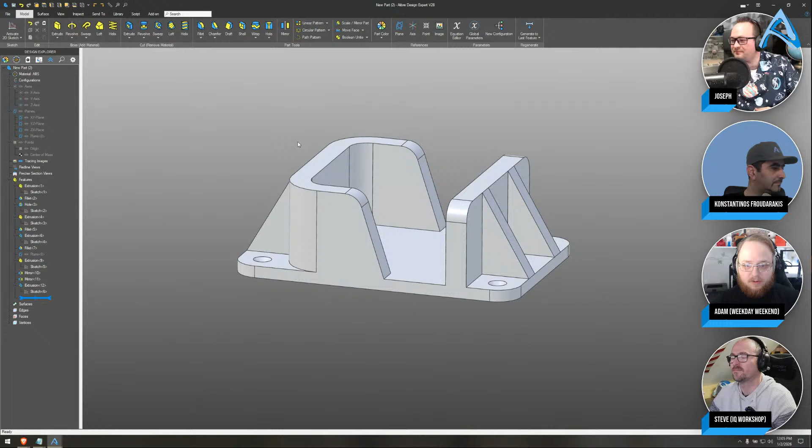I'm already in a part here and everything. This is Adam's screen. Project to sketch is basically just a quick way to get things from another sketch or other geometry into your current sketch. So if I go into a sketch here and then I just select a plane, doesn't really matter. If I wanted to use this exact curve right here, I could use my shortcut for that, or it's up here in the top left. You can click your edges or even a face that you're going to use in your current sketch.

And then you're going to tell Alibre how you actually intend to use it. You could use it as a sketch figure and have it all constrained for you with this maintain association, or if you're just going to reference it with maybe some dimensions or something like that. You can just use it as a dimension or whatever you need to do in your current sketch.

Sounds like we were echoing back a little bit. We had a little echo from you, Kostas. I muted you, sorry to do that.

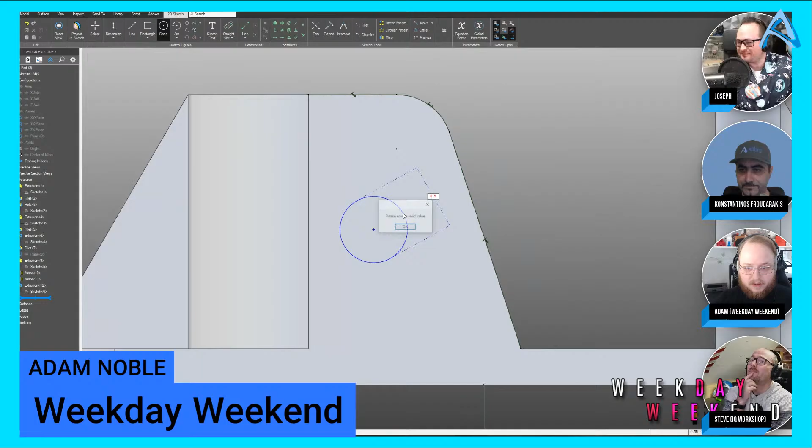Anyway, yeah. So if you wanted to make a circle here and dimension it from the top here, or whatever you might be using, or make it concentric with something, that makes it a little bit easier sometimes, a little quicker to do. Actually, it helps if I get rid of this dimension, that'll be what's causing my issue. But if you wanted to make it a little easier to dimension to existing parts of your geometry, that's what it does.

So just as a follow-up question on that, obviously Alibre is parametric and you can go backwards and forwards in your timeline. Is there a way that you can ensure that your projected sketches follow any changes you do before that point in your timeline?

That is a good question. That one might be another one for... I haven't had a whole lot of trouble with that, but that might be a better question for Joseph or Kostas there. Ask me one more time, Steve, sorry, I was working on our sound here.

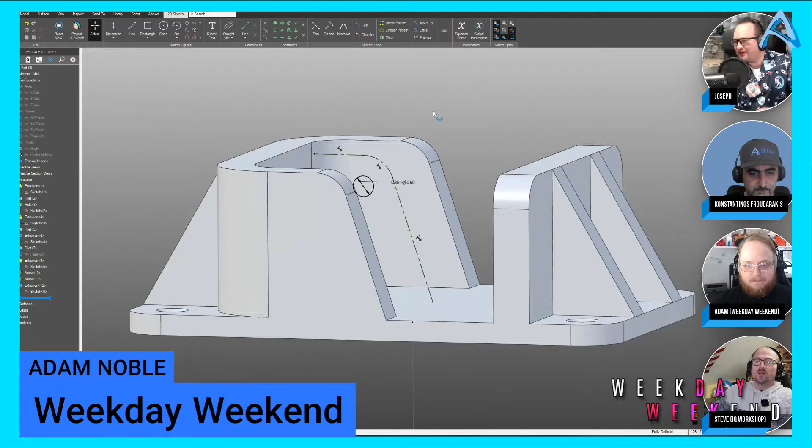So when we project into sketch, you can choose whether it's going to create sketch geometry or reference geometry. Because Alibre is parametric and you have a timeline, is there a way that you can ensure that if you make a change before the projection, let's say you change some dimensions, that projected sketch follows the changes you make within your timeline? How can you make sure it's all constrained and you don't lose the logic of what you're trying to do?

Great question, and that would come down to checking the box of maintain association. Then with association maintained, it follows the geometry. So if you can see here, I'm changing this angle of this drafted surface, and it is following it because I did that maintain association. It is indeed keeping that concentric with this arc here.

That is a great example to come up with on the fly, Adam. That's very impressive. And a lot of that will automatically dimension. If I try to dimension that and do a concentric with that arc, it'll usually automatically grab it. But there's certain things maybe you want to coincident with a point or a line that is already in your geometry.

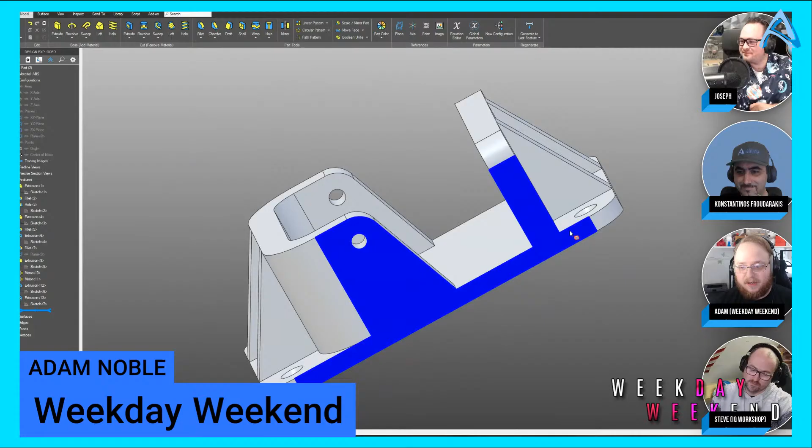Maybe something that's on the other side that you can't necessarily see. Maybe it's not a symmetric part, like this part's completely symmetric on one side to the other. Maybe it's not, and there's something on the other side you can't see. That's where it shines a little better. Because if you can see it, usually you can just dimension to it without issue, but if it's hidden, that might help you a bit better.

Nice. Let us know if that answers your question. Steve, I'm going to stop doing your job. Sorry, I stepped on you.

I see another one. Can you explain the motion hierarchy of motion in assemblies?

I can take that one unless someone else has anything. Well, take the wheel. All right, I'm going to go for it.

Let me get my screen showing here, and I've actually got a model that I can pull up. I'm going to pull that up. There we go. Okay, sharing my screen, and loading my new assembly.

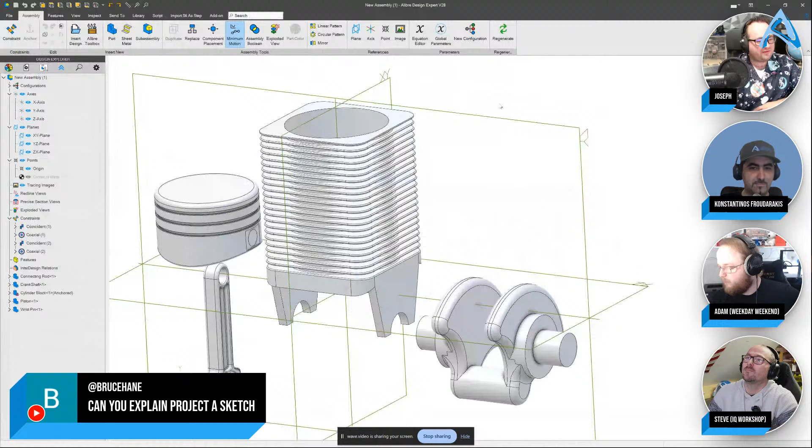So I have here this unassembled small engine, and this is great because, how do we prioritize motion in assemblies? We use a system of constraints where we say, I have the outer face of my piston, I want it to go into this round face of my cylinder block, and we make it concentric right there. Once I apply this constraint, I can move the piston in every way except breaking that concentric relationship between the piston and the cylinder block.

And I can do the same thing, make it concentric with this rod. Again, we allow for all kinds of rotations and twisting, everything except what breaks what we already have applied. So if we put it into a hierarchy system, I would say whatever you apply first is what gets enforced as its top priority, and then everything else is allowed to move until you constrain it.

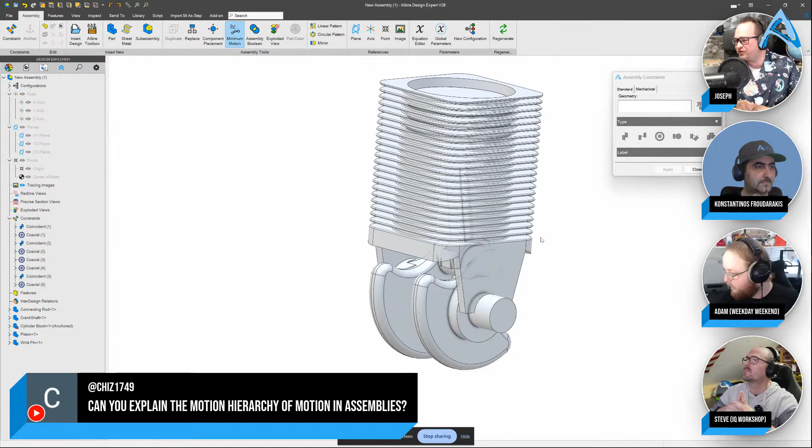That's how we can get to something that moves just the way that we want. Hopefully that makes sense. What you apply first is completely enforced, and you keep adding new relationships until you're only able to move in the way that you want to. Let me know in the comments if that answers your question, and hopefully it does.

Can you provide some tips on using constraints and ways to stay away from the over-constrained error message?

Great question. Is that probably for sketches, I'm thinking? Yeah, usually that comes up during sketching. I can take that, but I don't want to hog the spotlight. Anybody else have a preference?

All you, Joseph. I'll go ahead and jump into a sketch here. Again, if you're asking about assemblies, let me know. But here in an active sketch, I can start laying down some sketch figures, maybe with arcs, that would probably be the best example, because arcs can be pretty tricky to constrain. In fact, I'll make this arc. So let's say I have an arc and I want to start constraining this sketch.

My number one tip when you're asking about what's constrained and avoiding over constraints is click and drag. When we click and drag, we can see how the sketch is allowed to move, and that gives us really strong hints on what we want to constrain. So I know that I can change the angle of this line, and I might say I want it to be vertical. If we constrain that one step at a time, we can see that now the line is going to stay vertical no matter how I manipulate it.

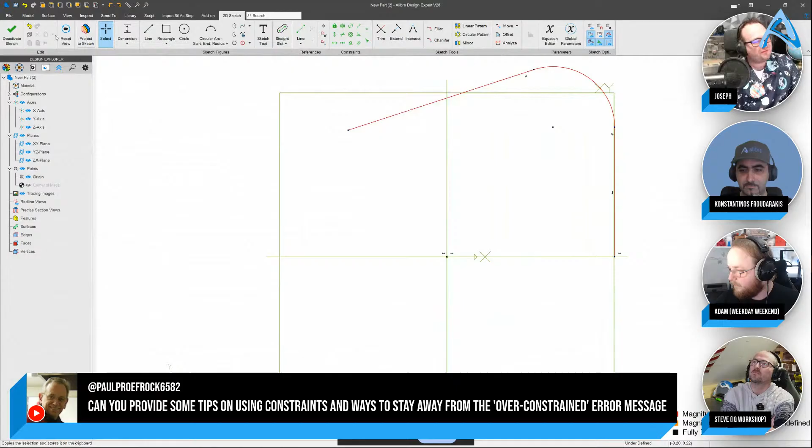I can move the end of this line. Maybe I want that horizontal with the origin, right? We just add constraints one at a time, nothing to stop us from seeing again how the sketch is allowed to move. I can say I want this arc to be tangent to this line, and then click and drag. That's what I might say, because if we start constraining something in a way that we can see it moving, we know that we're not adding any redundant constraints.

I might give this an angle of 25, and I can see that my arc can change radius. Adding these kinds of constraints to a sketch really is an art form.

With some practice, you can look at a sketch and have a really good instinct about it. If you're just starting out, there's nothing wrong with saying, let me just click and drag. Now I can see I have only 1 degree of freedom left, and it's the length of this line. Maybe I want it to be horizontal with the origin. So we know the kind of sketch we want to have, and we can just take small steps to achieve that. Hopefully that's an adequate explanation. I don't know if anybody here has anything to add.

He looks like he's saying that he's having it shown in assemblies as well. Ah, okay, perfect. Yeah, and right quick, sorry, didn't mean to interrupt there, Bruce.

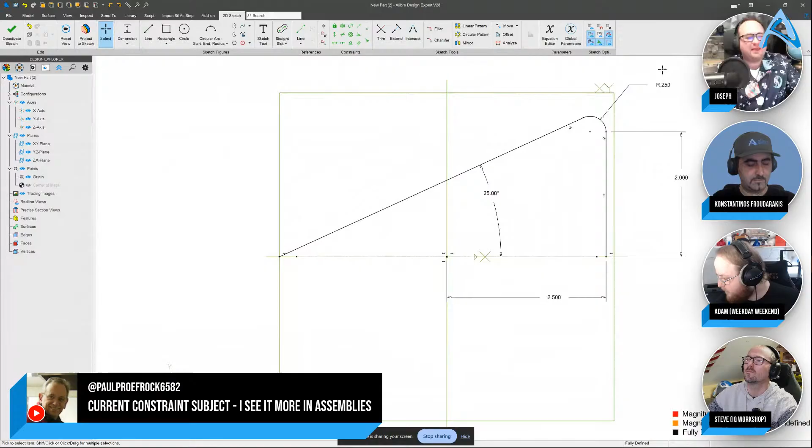There is a lock that you can do. You can lock sketch figures and things without necessarily dimensioning them. Of course, you would usually want to dimension everything as much as you can to get it fully constrained. Yeah, exactly. Thanks, Kostas. Sorry, didn't mean to interrupt you there. Awesome, no, I'm so glad. Please interrupt me all the time because you guys always have great things to say.

The nice thing is what I just explained about sketches really applies to assemblies as well. If you think about sketches as taking all these degrees of freedom of how the sketch can move and constraining them, same thing with assemblies. We're just dealing with moving parts, and often feel free to utilize this click and drag technique.

So once I add a few, I can see I can twist here, and I don't want to twist here. One great way to prevent twisting is I can select a flat face, or I could even show reference geometry, and then these orange planes are the planes that I used to model the part from the part environment. I'll select a plane, make a constraint, and if I don't want that piston to twist, well, I can apply that, but that makes it so the rod can't swing.

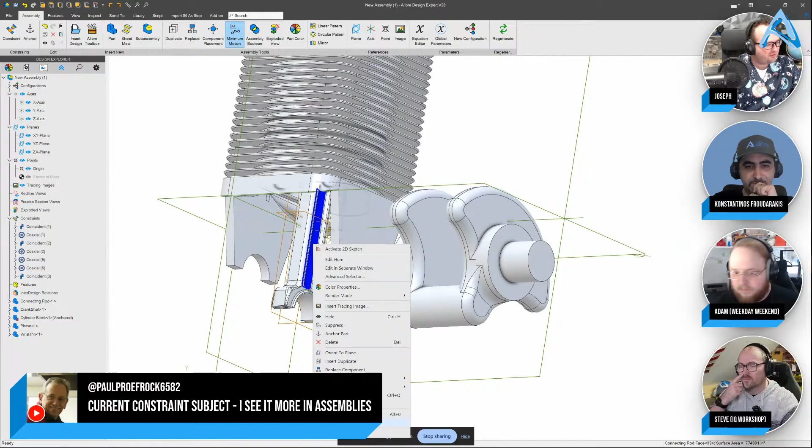If we end up in a situation like that, we can look at our part in the Explorer, go to our constraints, and I can edit that coincident constraint, and maybe make it an angle. Actually, 90 degrees is what I wanted. And now, because we did an angle, our rod should be able to swing, and I'm not seeing it swing.

So of course that happens. Let's suppress that. Yep, sometimes you need to uncheck minimum motion for things to work when you have multiple constraints. But again, constraints are a highly mathematical thing, guys.

There's a lot of work in the background from Alibre to try and understand what you're after. For example, we're used to putting something in place using 3 coincident plane constraints. But in Alibre, things have 6 degrees of freedom: X, Y, Z, and 3 rotations. Using 3 planes to constrain stuff gives you 9 degrees of freedom locked down.

So Alibre needs to figure out which are the 3 redundant ones, and give you what you want. And that doesn't always work. It is an issue in other CAD software as well. It is an issue in Alibre as well.

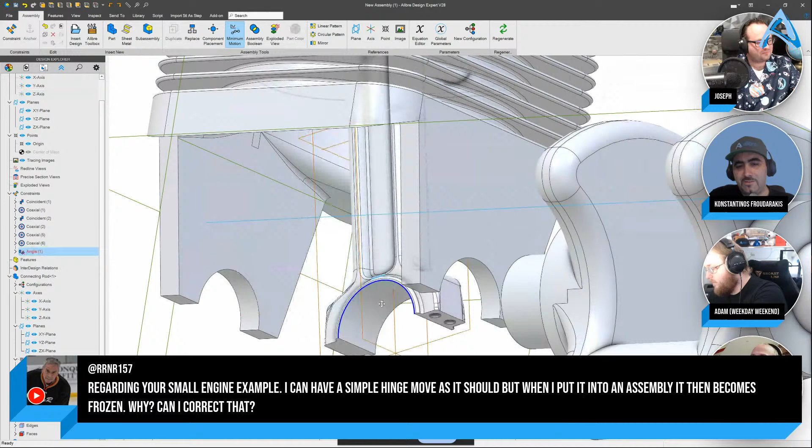A few other tips and tricks, like what you said. For example, if I may interrupt you there again, that very problem you had, Joseph, in a similar video I did, I constrained the plane on the piston, not the rod, and that might make it work. But it's such minute changes. And Joseph on the official Alibre channel has a very good video on creating assemblies with such constraints.

So thank you. If you do come across errors, everything that Kostas said is of course fantastically on point. Also, when we look at what could be causing the error, this is not an Alibre issue. Every modeler has really intense algorithms that figure out these mates.

One big issue, which applies to all modelers, is if I put a constraint and make that concentric, we've eliminated the crankshaft's ability to rotate around the top axis, eliminating a few degrees of freedom. If I apply another mate, like putting this right up against that face, this mate also eliminates that same crankshaft's ability to rotate around the top axis. Using mates that eliminate redundant degrees of freedom can be the cause of most errors you see in an assembly.

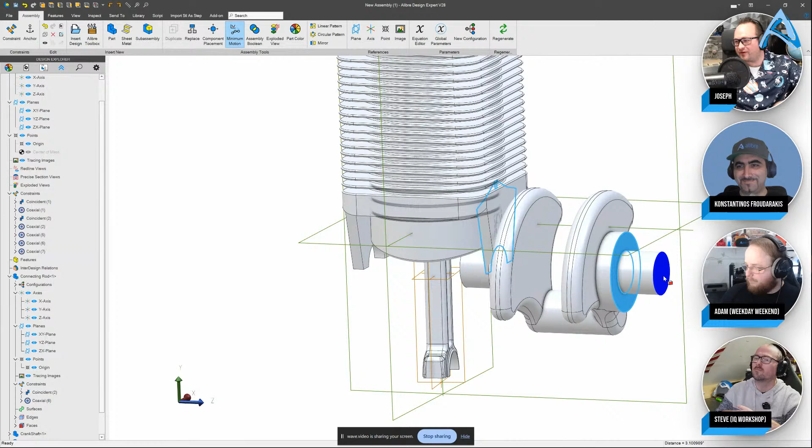So instead of making all these big faces, you can put a point on there and make that one point level up with the plane. Any modeler using Alibre or any other modeler, that helps fix those issues. It's kind of a universal algorithmic problem — there's probably not a perfect constraint solving engine out there.

Again, it really starts with clicking and dragging to see what your degrees of freedom are, and then eliminating those one by one. Let me know if that helps in the chat.

Yes, a frozen subassembly — I can take that one since I have some things up already. Let me save this. Why not? Oh, I better not, I'll do a save as, because this is a webinar part, so I don't want to.

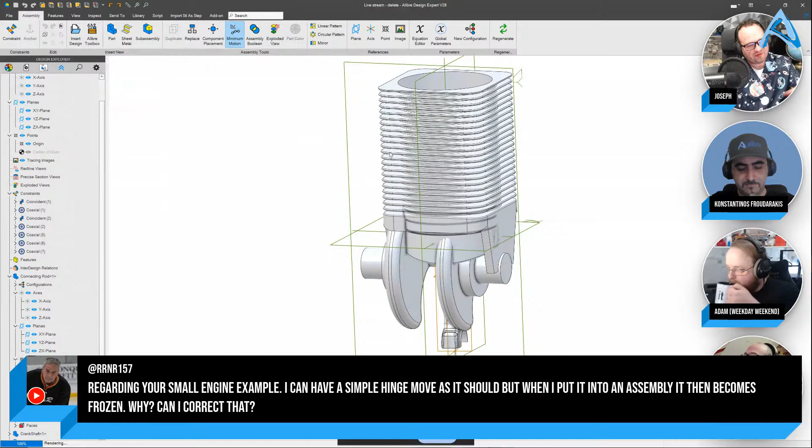We're going to make a little temporary assembly here and start a new one. Oh, I just opened a part. Okay, so we're going to say new assembly, and let's import the assembly we've been working on. It will come in frozen.

Okay, perfect — again, can't move anything. You might ask yourself what's going on. So we're going to right click right here and say make flexible. By default, all your subassemblies come in frozen, so that when you move something, a thousand parts don't fly everywhere unpredictably.

So we manually make that flexible. Looks like that's still anchored, so now I can move all the parts in my subassembly. Hopefully that's a pretty simple fix for you that you were able to see in real time. Anyone else have anything to add?

Nope, not at the moment. All right.

I have an error that says entity is deleted when I try to extrude, but the sketch looks complete. I can modify it, but it won't extrude without the error.

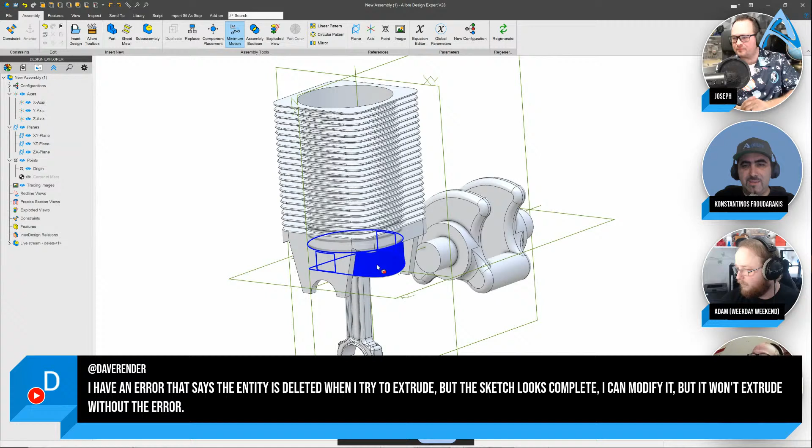Sometimes I've come across this, and Dave, I don't know if that's exactly what you're trying to do. If you're coming from a different CAD software like SolidWorks or Fusion, you might be used to making sketches that have more than one closed area or section, and Alibre cannot extrude when you have more than one closed section.

So that's one way to fix that. The other potential problem, which we discussed in the previous live chat, is especially when you're importing sketches copied from something else, or importing a DWG or an SVG — sometimes you get duplicate lines. In these cases, you want to use the Analyze Sketch tool, which is a massive help.

If you want, guys, I can do a quick demo. So this is pretty much the example we did last time — this is just a simple slot. If I try and extrude this, it's going to let me extrude, and it's letting me drag and do all that.

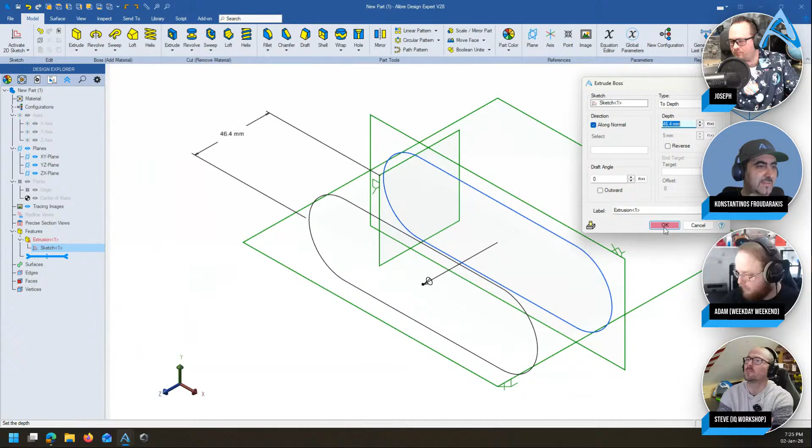However, if I have an overlapping line here, it is the exact same thing visually. But if I go and extrude it, it's not going to let me. As you can see, I've got a red button there, and if I click OK, the extrusion comes in with an error.

Sometimes the errors are very helpful — it says here the sketch cannot be used because an endpoint is wrongly shared by multiple primitives. When you see that, you should look for overlapping lines.

Sure enough, if we go back in and use the Analyze tool, let me bring it over and click OK — you get an open loop, and it shows you where the open loop is, plus an intersection and an overlap. All of these errors are caused by the same thing, which if I go in and delete, we should be fine.

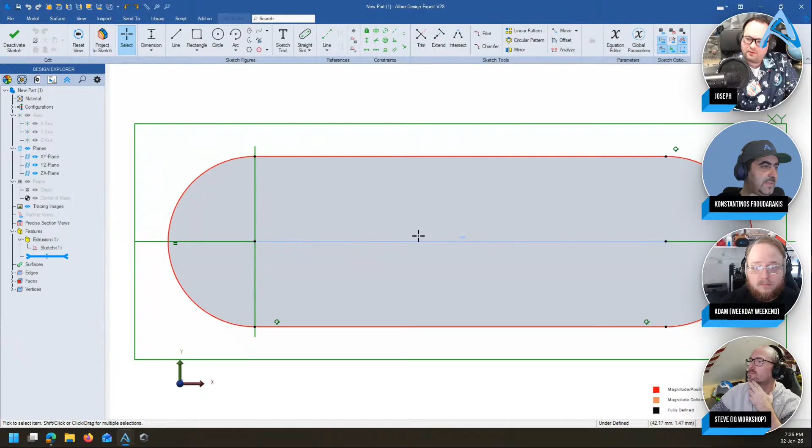Right, and now I can extrude again, right? There you go. So yeah, just to show you what I mean by multiple sections - I don't mean this, Alibre is going to know to make a hole there. What we mean by multiple sections is something like this, right? These are multiple sections.

So yeah, Alibre is not going to know what to do with that. If you're a SolidWorks user, you might call it multiple contours. It's different lingo - contours, sections, I think Fusion calls them that. But still, I hope that answers your question. If it doesn't, let us know again and we'll discuss it further, because this is a great issue, right? This is something that comes up very often, and it's definitely worth discussing.

Another quick addition to that - this is Max. If you're seeing an error that says something like attempting to access record marked as deleted, it's just a general error. Oftentimes you're in a weird state - and by that explicitly I mean that some chain of events has occurred where your part may be in a state such that you might want to back up to your previous save, depending on the nature of what that error message sounds like.

Sometimes it'll keep going and you'll be fine. Sometimes the weird state can compound on itself. So especially if you can find ways to reproduce that consistently, that would be an example of something that you should send to us so that we can look at further. It really just depends on the wording of that error - sometimes it's something you can fix, sometimes it's not. And maybe you should just delete the sketch and start over.

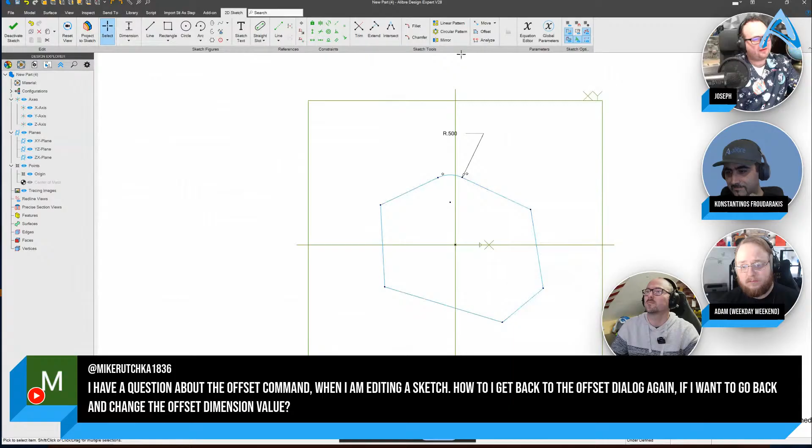If I jump in here - I'm already sharing my screen. Let me open up a new part and create a sketch. Let's say that I have this sketch that I want to offset. I'll make it a little bit more interesting. There you go. And so I can chain select and offset right there, and I give it a value, and I want to offset that later.

As of right now, of course, it's not parametrically connected. We do get a lot of requests to get that, and we are wanting to work on that. But as of right now, perhaps the easiest thing to do is just chain select, delete, and then we can re-chain select and offset again to our new value.

And if you leave things unconstrained, then you just delete the red stuff and start again - it's kind of an indicator that that's their offset value. If you do fully constrain it, then you should be able to just adjust this dimension and have it update automatically. So I think that's the best answer I can give. Let me know if anybody else has anything to add.

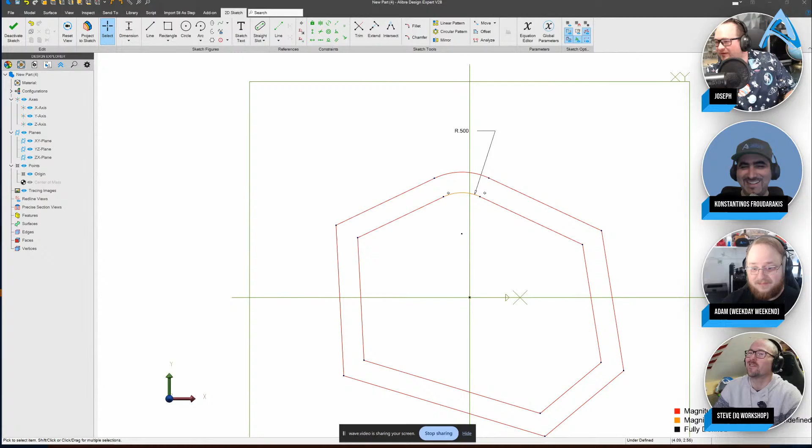I saw a very interesting question. Oh, here's another one. Well, one did come up, but I saw a very interesting question about Kostas being gracious in helping someone, if I can find that one. Yeah, wow, our producer is on point. That was amazing. Yeah, Rufus, yeah.

So I'm saying, people, first of all, thank you so much to Rufus for being so kind, and people join the forums. Join the forums. First of all, your question might be the question of somebody else, and by asking the question, you might help somebody, which is true for this stream as well. And secondly, you will see that there are many people active in the forums and eager to help. Right? It's part of the value of Alibre, if I may say so. Right?

It's the forums are so good, so come chat with us. I'm a bit of a beginner on Alibre, and there's nothing much I know about the system program for me to even do anything you all are talking about.

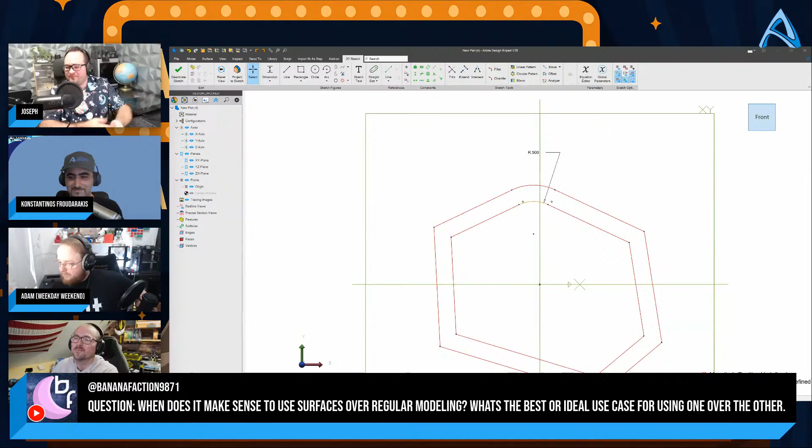So moving right along, when does it make sense to use surfaces over regular modeling? Oh, this is awesome. Is there an ideal for one or the other?

This is made for Joseph, this program. I can certainly pull up a good example. Does anybody have any comments as I pull up a new model here?

Oh please go ahead, I think. Well actually, can I just say we had a great example in the first live stream where we turned the model into a surface, did a thin extrude, projected that thin extrude to get parametric sketch offsets. So that's a good use of it. But I'm sure Joseph has like 1,000 different uses for it. I'm just sure he does.

Yeah, Kostas knows exactly what a fan of surfacing I am. So I would say if you can model and get the job done using solid geometry, do that. It's going to be a lot more simple, more straightforward. If someone else wants to go through the model, it'll be simpler for them, and it's probably less computation depending on what you're doing. So prioritize solid geometry.

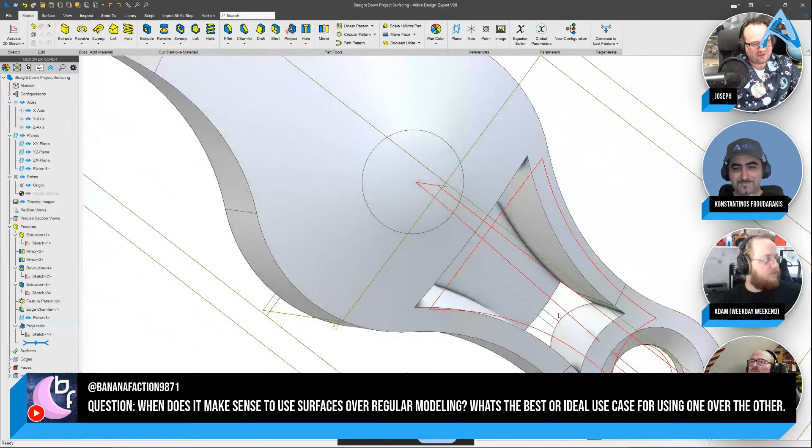Well, if we're going to CNC that, those walls have a lot of overhangs, and that's just not going to work well. I went too far down and broke through the bottom there, but that's not good intent. We want our walls to be vertical, right? And what's the solid modeling solution? Well, it would be an extrude cut, but if we need this face to follow the same curvature as this face, it gets hairy with extruding, right?

So there's a few ways we could approach this with surfacing, and surfacing just augments our ability to do things like that. So maybe if I go with the surfacing solution, I'll extrude this to 1 inch, and then make this floating body a surface. I'll grab a surface here and delete this top face. In the surface workbench, I delete the top face, and now I have these infinitely thin references of the outside of this thing.

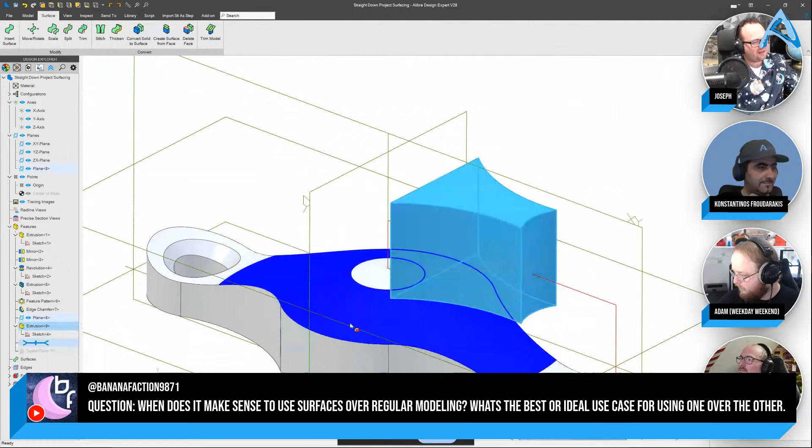But before I do that, let me select these faces here and then create a surface from a face. There we go, and I can move my surfaces upward. You can see that surfacing does break down into a lot of steps, and this is one reason why we may want to default towards solid modeling whenever possible. Let's move that in maybe less than 1 inch, maybe 0.5 upwards. No, 0.75. So we get what we want. There we go.

And then I'm going to modify my sketch. As you can tell, I maybe didn't have this set up for demoing yet. So make that, not that. No. Okay, that should do it.

So we've got the surface, right? And then we can cut out the bottom of this so that the curvature of this face matches. So we're going to say surface, trim model. We select our surface, and then we just trim out the bottom of that, right? Now you can either hide or delete face. There's schools of thought that are great for both. I tend to delete face to get rid of my surfaces when I'm done using them, but now we can take that back to a surface.

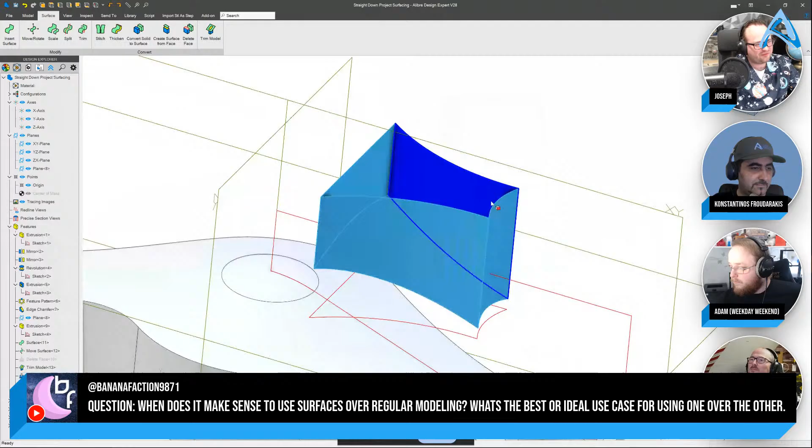Move that downward. We can tell this is just a lot of workflow for surfacing that might be able to be done in one operation with solid modeling. So we'll move that down 1 inch. Once again, trim model. I promise I'm almost done. And then if I go to hide my surface down here, what do you know? We have those vertical walls that are a lot more manufacturing friendly, right?

So surfacing, we can overcome those difficult specific problems by generating surfaces that do what we need. So that's probably the case to use surfaces over regular modeling, but default to regular modeling whenever possible. Let me know if that answers your question, and thank you for asking.

Greetings from the Space Coast.

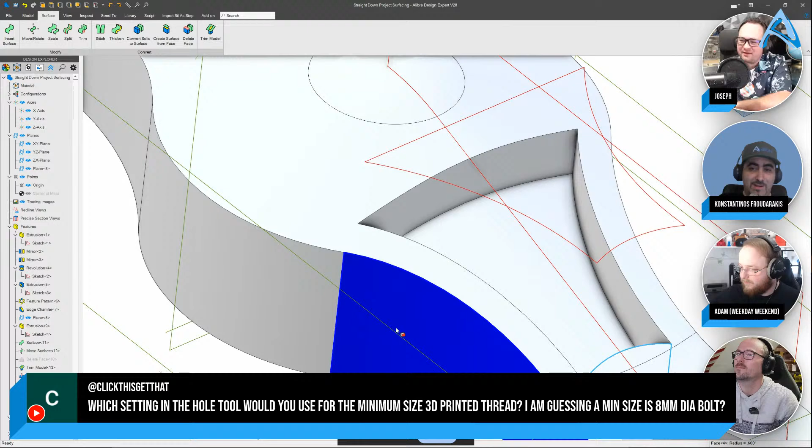As 3D scanning becomes more and more widespread and affordable, it's helpful to do a webinar or videos that show how to use surfacing. That might be an interesting one, a surfacing webinar. I have brought that up, and maybe that's the push over the edge that I need to start pursuing it. So let's talk about that internally and see what we can do. I think there's a lot of great value in webinars that cover lesser used features. I can second that, a webinar on surfacing, because every time Joseph puts up something about surfacing, I learn something.

Not just surfacing, direct modeling as well, right? Alibre has some really clever direct modeling features like delete face, like offset face, and stuff like that. And when we're talking about importing faces and models, surfacing and these direct modeling commands are a game changer, and they can get you some amazing results. So yeah, definitely worth pursuing, I think.

Thank you very much. Which setting in the hole tool would you use for the minimum size 3D printed thread? I'm guessing a minimum size is an 8mm diameter bolt.

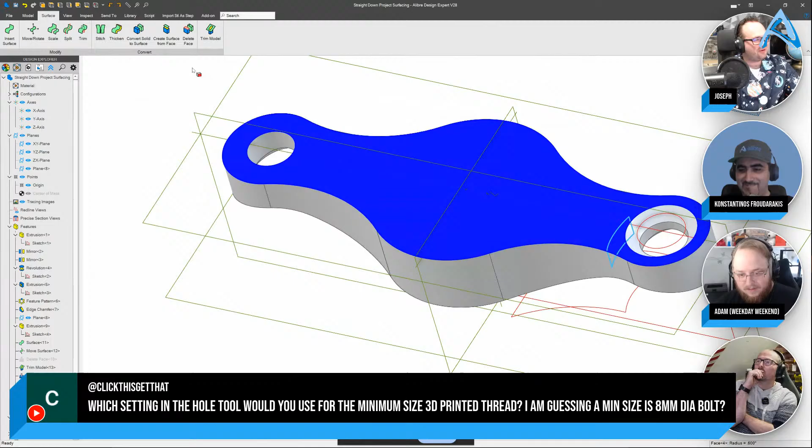I don't want to hog the limelight. I do have an answer for that because I was kind of involved with the threading, the thread and hole tool when it updated in V28. I'll take this one, let me know if anyone has anything to add. I'm not quite sure how on the hole tool, which setting in the hole tool do you use. Are you just talking about the...?

I think I'm running a lot of RAM right now, so I might be running a bit slower. But I'll choose - I think the question is talking about modeled threads, right? Yes, which Joseph indeed actually worked on most of them.

So yeah, Joseph, if you want to take that one, and then there's another very interesting question by David on how to use a reference line in a sketch as the axis of revolution. As soon as you're done, I might take that on. Oh, awesome, I'd love that.

I'm just going to open up a new part here, make sure that things are behaving for me. Don't forget to close - yes, that's probably the biggest thing if you're eating RAM. Steve always gives excellent advice.

We're going to go extrude that, and now let's jump into the hole tool here. Make sure things are working good. Okay, so we're going to say unified coarse, how about. And then we'll up the size of that, 0.5. And then we want that to be modeled.

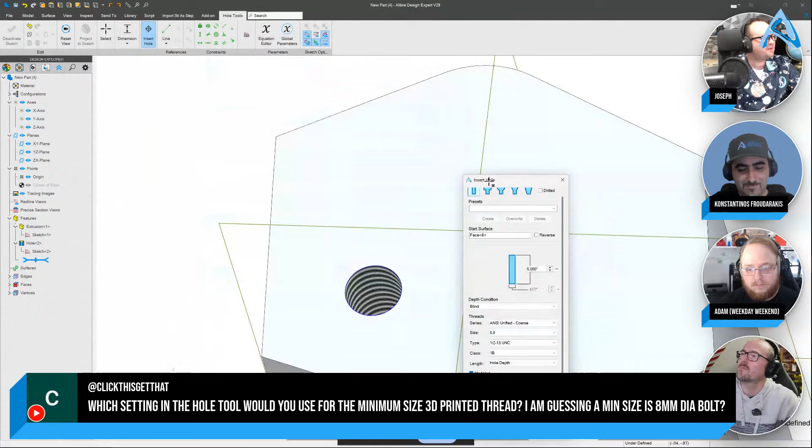And so when we go to the modeled, there are several options, and I think this is what the question is around. This is the nominal thread, right? And when we talk about screw threads, the nominal thread is when the male thread and the female thread have the exact same profile, no gap between them. So it's not a realistic thread.

If you want a production quality thread, and not all platforms do this - so I'm going to pop my collar as Alibre and say that we've got the cool features - we can change this to a production thread by going to, say, average. This is the center of the line tolerance for regular threads.

Now, when we go to minimum material, this is going to be for the loosest fit, right? Because it's the smallest amount of allowable material for the 1/2 by 13 coarse thread, loosest possible fit. Now, if you want to have a really tight fit, this would be the maximum material for the production thread. So if you're not on nominal, there's going to be a gap between your internal and external threads - this is for the smallest gap, tightest fit, and this is for the loosest fit.

Now, if you're 3D printing, 3D printers tend to overbuild a little bit, so you always end up with a little bit of extra material. I'd recommend always 3D printing on the loosest. But if you want to have a tap or a die and you want to fine tune it yourself, maybe you want to go the max material so you have the most material to be able to remove in a very fine fashion. Those are my thoughts on it.

Anybody else on here have any thoughts worth noting? You might want to also just double check that your 3D printer is well calibrated and all that kind of good thing.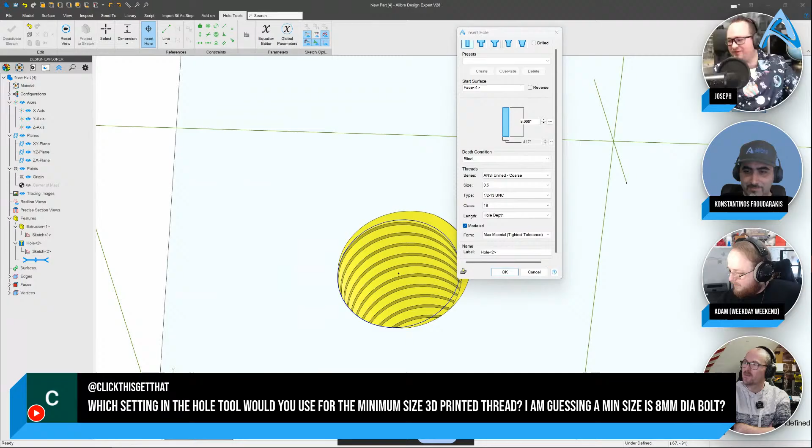Basically, just double check your 3D printer is well calibrated and all that kind of stuff. Threads are quite difficult sometimes.

Now, using the minimum material, I was able to get threads my first try, but I've spent a lot of time calibrating my printers. I don't know that my Ender 3 V2 Neo could do it. My P1P certainly can, but my other one might be a little iffy despite all its calibration. So definitely test out your own printer and learn what it can do, because every printer is going to be different. For me personally, using minimum material worked first try, but if it doesn't, you might want to do some flow rate calibration, which is usually built into things like Orca Slicer.

In addition to that, you can look at tolerance tests to print on Printables. There's bound to be some on there that you can figure out what your 3D printer is capable of producing.

You can make adjustments in your CAD for when you 3D print either the bolt or the hole. There's some tolerance compensation built into Orca Slicer as well. Yeah, unless you're doing something custom, my recommendation would always be to have a tap and die set, and run your threads through it. If you're printing something bespoke to your project that isn't a standard thread, then yes, you need to have your hole and bolt calibrated so they interface properly.

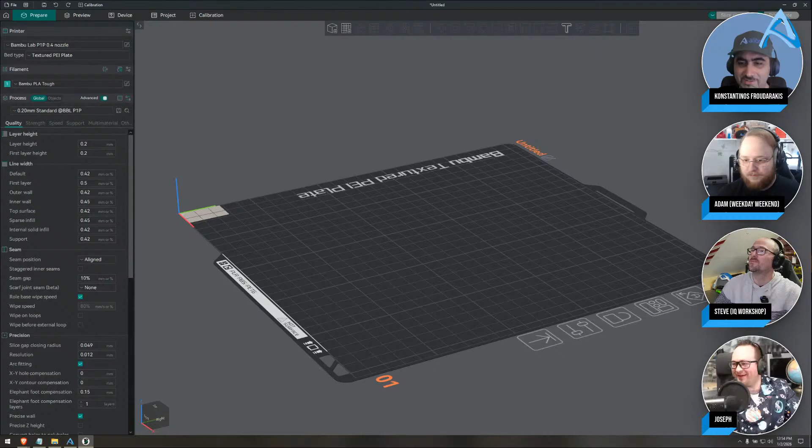This might be a good one here for you, Joseph. Actually, before we go there, let me take over the screen, because David had a great question, which is how you can use a line in a sketch as an axis of revolution. So let's say that I do something like this.

Okay, this is a bit rubbish as modeling, but still. Let's say that I want to revolve this. First, let me show you something - if you click in a blank space, you get this very handy toolbar, or you can just hit the space bar and it comes up as well. So you hover over part features and go into Revolve Boss, and you get your sketch pre-selected here. That fly-off toolbar is really useful.

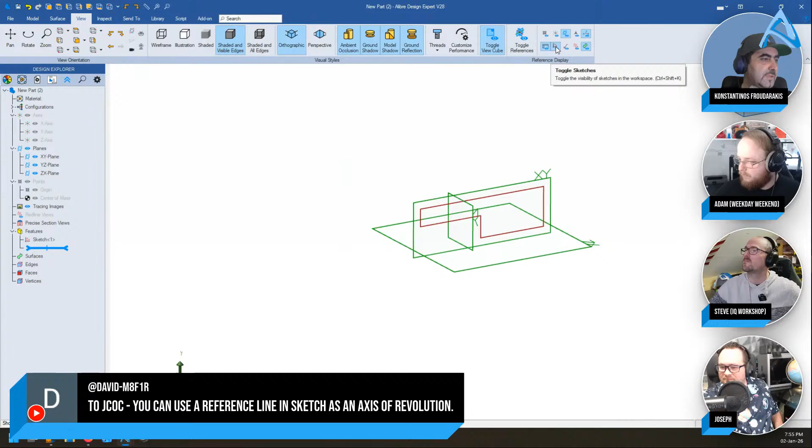Now, how to use a line of your sketch as an axis? First, you need to go into your view menu and make sure you have toggled your sketches on. The hotkey for that is Control-Shift-K. So you see I'm just toggling it on and off. But when you have it on, you can use your sketch lines as an axis.

For example, as soon as I hover over this line, you saw that it got a different color, let me show that again. As soon as I hover over it, it gets a different color. So I click on it, and now that line is used as the revolve axis, or I could even use this one. So first, you need to make sure you have toggled your sketches on.

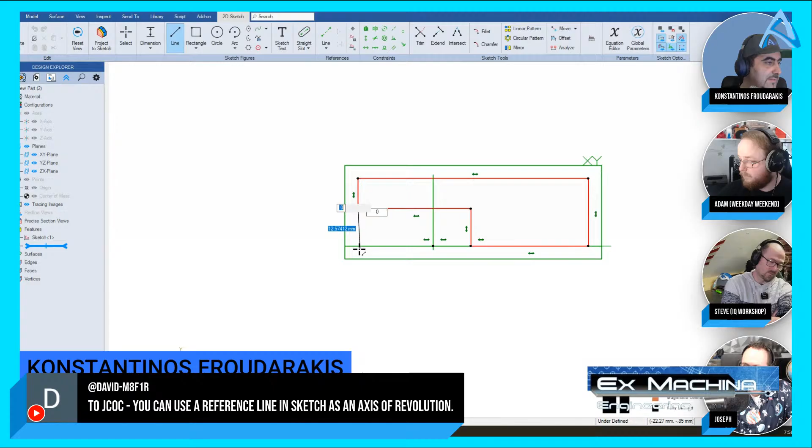And I want to show you yet another way to do it. Whilst you're in Sketch, there is a button in the references area of the toolbar that says Insert Axes from Sketch. Let's do something simple - let's say the axis I want to revolve around is a reference line. Now you see that when I close the sketch, the reference line is no longer visible, but I want to revolve around that reference line. So I hit here where it says Insert Axis from Sketch.

This is the window that comes up. I select this line, I hit Apply, close, and now as soon as I come out of my sketch, I have an axis here, which I can use to revolve around.

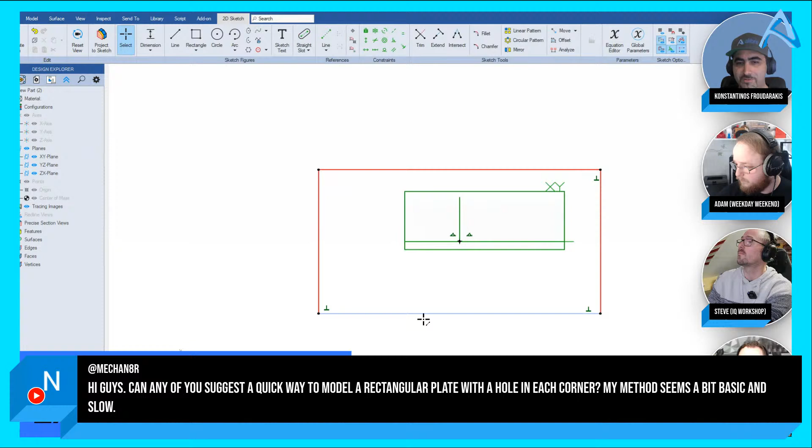So I select my sketch, I select my axis, and this is another way to revolve around a line from inside your sketch. If I can hog a bit more time, Mechan8r had a very interesting question. He said, let's say you have a rectangle and you want a hole in each of the corners. One way to do it is you can look through my channel and find the pattern fill equation, and use that to get one in each corner, or fill the entire thing with holes. But here's another way to do it.

Let's say this is 50 by 50, and I'll extrude this for 5 mil. This should be fine. And I'll put a hole here, slightly centered. And then this hole is also 5, and I'll cut through all. So yeah, this is a speed modeling quick tip.

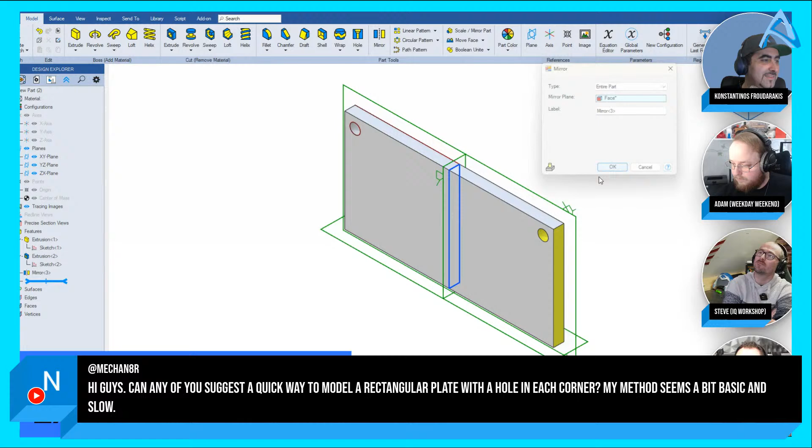Just use mirror. If you use this as the mirror plane and mirror the entire part, now you've got 2 holes. Then if you do that again and mirror the entire part, now you've got 4 holes, one on each corner. So that's a quick way to do it. If your part's conducive to using this, just model a quarter of it and mirror it around.

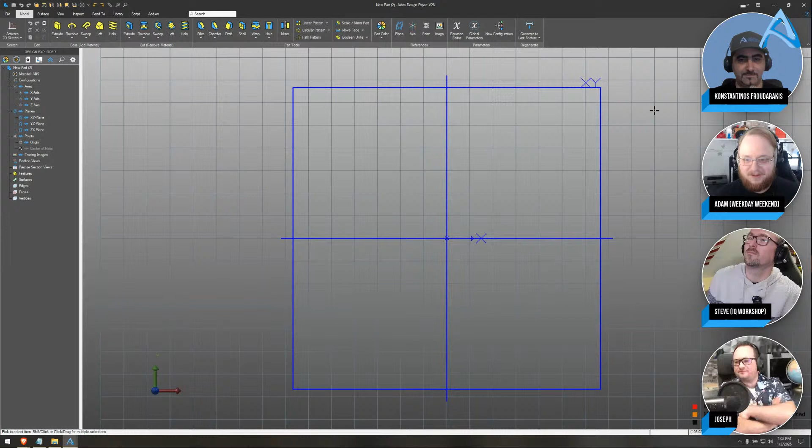Okay, so I don't even, I love your color scheme by the way, thank you, I hardly ever use it. It's this very top right here, kind of small to see, but this little padlock looking constraint right there, the fixed constraint, that's what you'll want to use. And you could have a bunch of stuff, and you can just Control A and you should be able to just.

Oh, my fault. But you can just fix your stuff with the fixed constraint like that. There we go. Yeah, if I do it all, it tries to fix them all at one time. But just use your fixed constraint, and it tells Alibre, hey, what you see is what you get, just put it right there, don't worry about it. If you can, always dimension it, though.

I'm glad you guys were here, because I think I was reading that question wrong. So I think that's exactly right. And let us know if that's not what you wanted.

In sketches, I sometimes try to add a dimension and get a message that there's too many constraints, but picking up slightly different points or a different order will make it work.

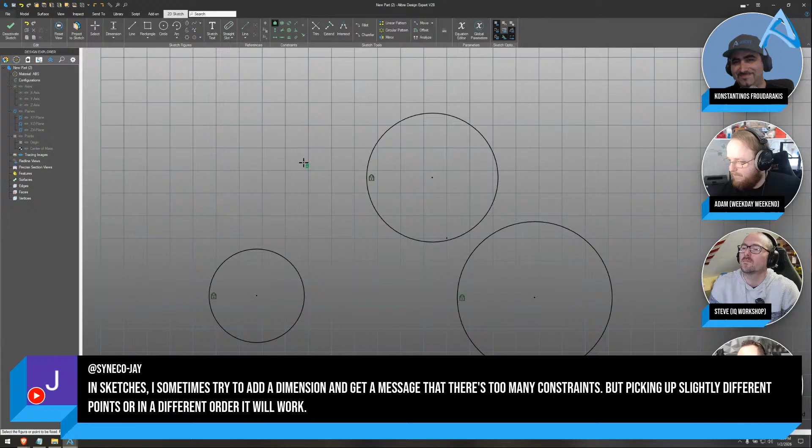Sketch solvers - it happens in every platform I've ever used, but I think they're quite rare. It again comes down to the same principle of: can we establish this sketch with fewer constraints, or constraints that eliminate 1 degree of freedom instead of 5, so that the next thing we add limits the amount of redundant constraints when you lock up different degrees of freedom.

Again, this is kind of a theme for this stream. I'm really liking it - we'll call this the redundant constraint stream or something. The more complicated your sketch gets, the more likely you're going to run into something like that. And it's not necessarily the fault of Alibre or any modeler, just that the more stuff the algorithm has to work through and calculate, the more likely something's going to catch on something else and you'll run into an issue.

Can I just add another thing? When working with a parametric design software like Alibre, or SolidWorks, or Fusion - every time you're working with a parametric CAD, not AutoCAD or SketchUp - it pays to have simple sketches. Every little feature of your model should be a different sketch, and a different feature at that.

Sometimes people will tell you that layout sketches are the best or fastest way to work. In my experience it's not, because then it becomes very difficult to troubleshoot your model or to actually control it parametrically through global parameters or through Excel, which Alibre can do both.

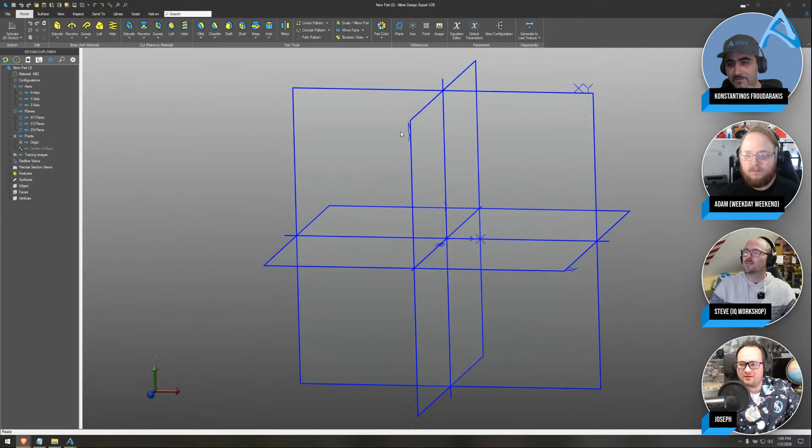So, you mentioned the sketch analyzer to try and find faults - is that available in Atom 3D? Or where is it, because I can't see it.

Great question. So in expert and professional level, in a sketch, we have this nice little analyze feature. I have to lay some sketch down here, but analyze is right there in expert and professional. In Atom 3D you don't have a button that invokes this, but if your sketch has an error - if I maybe make a line on top of a line and we deactivate the sketch - I have my warnings turned off actually, but a little warning will come up normally if you don't turn it off, and then it gives you the option to analyze the sketch. So it's a bit more baked into the system than being forward facing, but there you go.

Ted Nickel on Facebook, I think he just answered your question as well - overconstrained, that analyze sketch is going to help you out right there. Or you can look at the error that comes up with the sketch, that's going to tell you what caused the error.

Often when doing a sketch, I use the dimension tool, and the last node or line is automatically selected. Is there an option to change that behavior?

That's a good question. I'm not sure there is, but I just love that feature. It's helped me in so many speed modeling qualifiers, where you add a constraint to a line, like an equal or vertical constraint, and then you just hit D and you're dimensioning that line. I don't know, I actually love that feature.

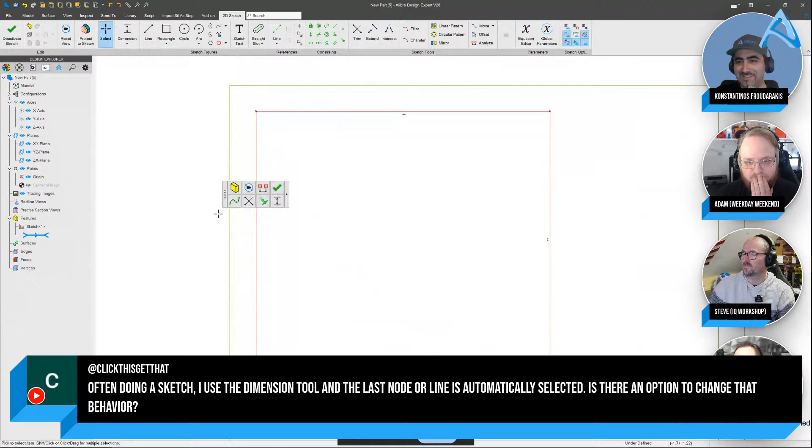So for example, if you make two lines equal, the last line you selected is kind of left in memory. And if you hit D, you're actually straight jumping into dimensioning it. Yeah, so I just love that behavior. I don't know if there's an option to disable that.

Okay, I've got one that's simple. If I make these equal, and then if I just click in the white space and hit D... yeah, exactly, if you click in white space, it's deselected. Interesting. That could be a good suggestive feature, maybe it's easy to do.

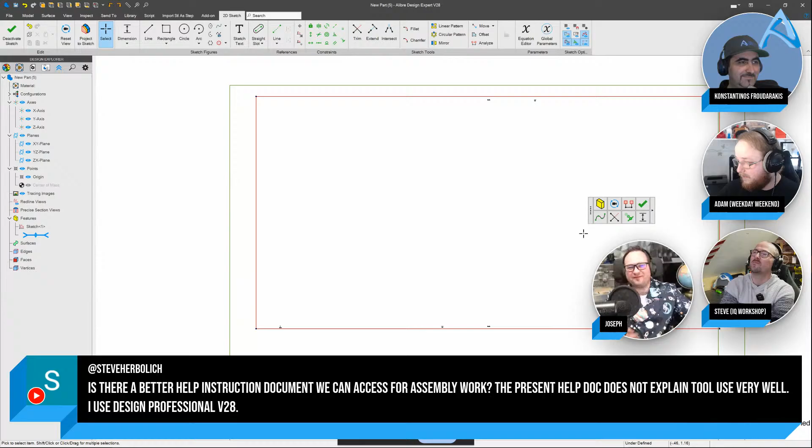Interesting. Well, we have the official documentation at help.alibre.com, if that's what you're referring to. There's also a lot of material on YouTube. We have a long playlist covering all of the assembly workflows. And then there's some YouTube channels out there like Weekday Weekend and Ex Machina. Ex Machina doesn't have a whole lot on assemblies, but Ex Machina and the official Alibre channel will definitely have you covered there.

Why can't I use a disconnected line in a sketch as an axis of revolution for the intended feature? Yeah, it comes down to how we need closed contours to define how we want to revolve. This could be a good one for you, Kostas, since you're pretty sharp on revolves. Yeah, I just did an example of that, but it doesn't hurt to do it again.

So if you guys just show my screen, because this...

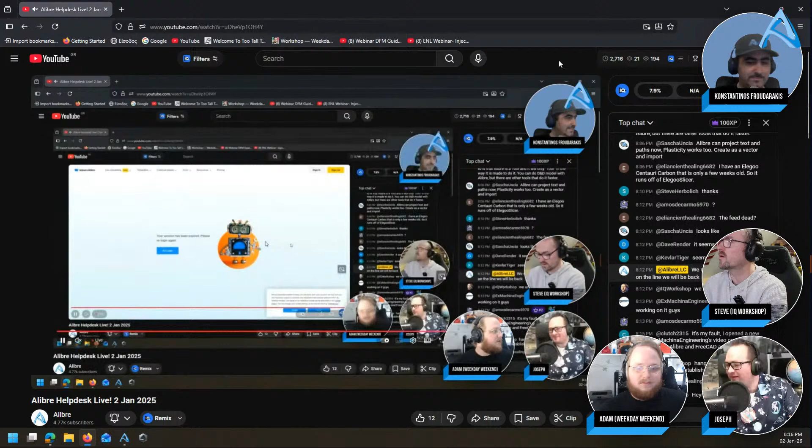Oh, we're back, live. Screen recovered. We're back, guys. We're back in business. Okay, leave us a comment if you can see us. I think we are back, looks like we have a session expired. Maybe, I can see us on the live stream. Oh, that's my screen, is it? Yeah, that was my screen. Okay, there we go.

Okay, so we're back. Sorry about that, guys. Just to answer the question that was on screen when we crashed, which was about... well, I can't find it now. It was axis from Sketch, I believe, but James something, I don't remember the name exactly. We did mention that briefly, but it's a good example to go over further.

So what I did earlier on this stream is I made a reference line here, then went to insert axis from Sketch, selected this one, and made an axis out of it. Now I can hit revolve, and as an axis, I can select this axis I just made, and I get the revolve.

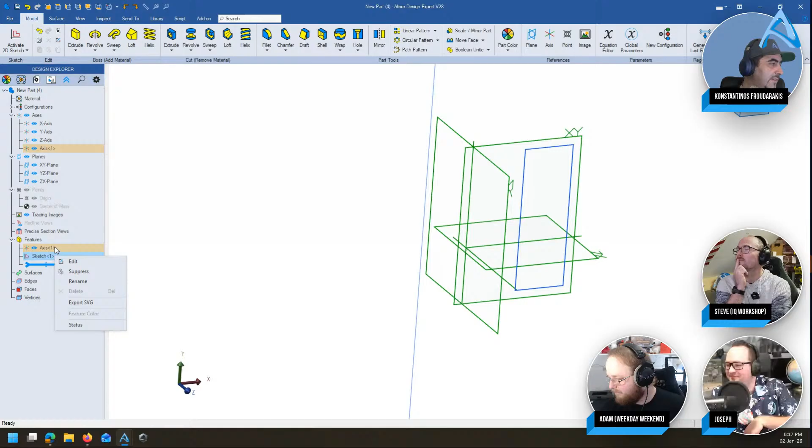Cool, that works. Now there's another thing to be said here. Let me hide my axis again. If this one is converted to a regular figure, even though I have my sketches showing, here's that line. If I try and revolve it, even if I select this line as a revolve axis, it's not letting me do it. The reason is that line is a regular figure, so we fall back to that same problem with the two sections not being usable for features.

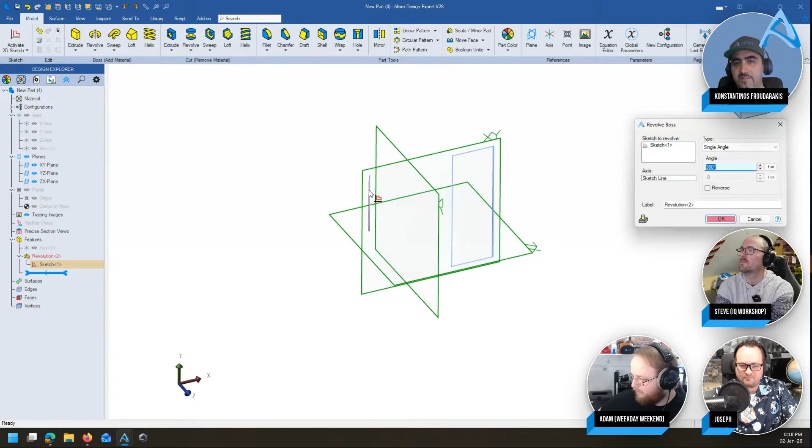This is a different section or closed loop as far as Alibre is concerned, so that's why you'd have to close it off. Even if I select this sketch, even if I select this line, it's still not doing it, because this is a regular figure. So if you want to use it as a revolution axis, convert it to a reference line, then use insert axis from Sketch, and you'll get an axis created, which you can then use for whatever axes are needed. Brilliant, so that's that.

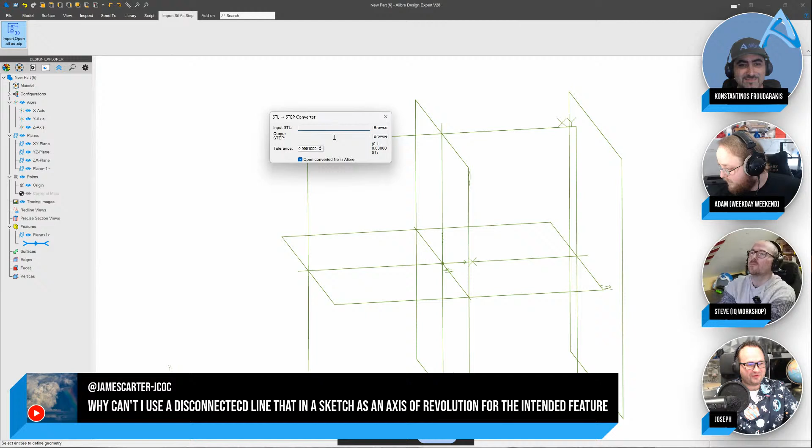On the Alibre forums, he has this import STL as step add-in that you can have, and I still haven't used it, but you can choose the STL that you want to input. It's great, isn't it? Yeah, then you can have your output step file, and it imports it into Alibre that way. So there's third-party software, and there's also that add-in. The add-in, of course, is not made by Alibre, so it's third-party, but great user on the forum, if that helps.

That's another reason to visit the forums, right? There are some great add-ons there, made by amazing people.

Ted on Facebook, it might be worth adding this as a feature request. Then I know they're looking at a lot of new stuff, and it might be something they'd be willing to consider. I would put that there as a feature request just to see. And as well, if you have any feature requests related to scan data or bringing in mesh data, make sure you also explain what you want to do with it, because part of the reason we haven't done it yet is that depending on what you want to do, it requires vastly different sets of technology.

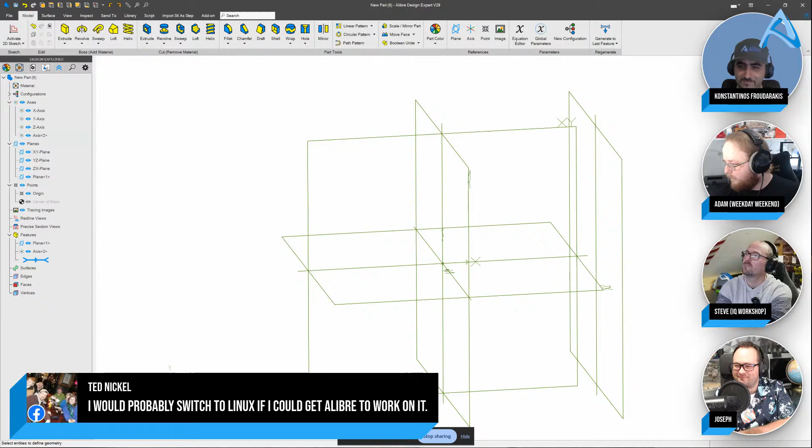If you just want to look at it, that's pretty easy. If you want to look at it, cut it in half, and interrogate a cross section to create a sketch, well, that's a whole other thing. If you want to convert it into a solid and drill a hole through it, that's a whole other thing too. So it helps us hone in on which technology sets are most valuable if we know why. So be sure to include that if you submit a request.

And one quick comment for you, Costas. I like the Alibre hat. Thanks, David. So Davinchek also makes some great videos on Alibre and plasticity, I think. He's made some great content with Alibre as well. Yeah, really nice YouTuber. And thanks for the comment. I didn't make the hat, actually.

Well, I guess here's the plug. That's a nice hat, Costas. Where'd you get it? That's a nice shirt, Adam. Where'd you get it? There's a website, isn't there?

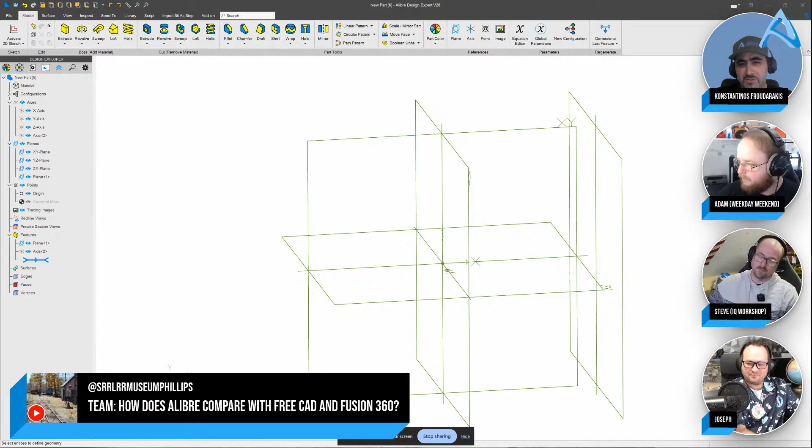It's like microtransactions, exactly like microtransactions in video games. As soon as you throw in a single one of those extensions, Fusion becomes horribly, horribly more expensive than Alibre. And as I've said very often, Alibre is something like 20% of the price for 95% of the performance. So that's my take on that.

It's based on what you're going to use them for. We're not saying FreeCAD isn't a good CAD package, but for the money, do you want to spend however much Fusion is per year, or pay once and get Alibre for as long as you need it, and when they come up with an update you need, pay the update cost. But when it comes down to it, guys, Atom 3D is $200. You wait for a sale, you can get a little bit less than that. Atom 3D is amazing, especially for 3D printing stuff and hobbyist work. If you're doing professional stuff, I mean...

Can I also say, because Adam just reminded me of something? Many people say Atom 3D is the hobbyist level of Alibre, right? Well, there's a difference. With Fusion and SolidWorks, if you use the hobbyist level, it is illegal for you to make money with it. With Atom 3D, it is not. That's a pretty important distinction, and I just had to get that out.

Without getting into legalese, I would also recommend people check the terms of service of their other CAD softwares versus Alibre. In my personal opinion, Alibre's is way better and way more consumer friendly. I did a video on FreeCAD going through their TOS and disclosure policy and how much of my data is being shared with God knows who. So my take on FreeCAD is, one, I love the fact that it exists, in the sense that there is an open source piece of software that has features.

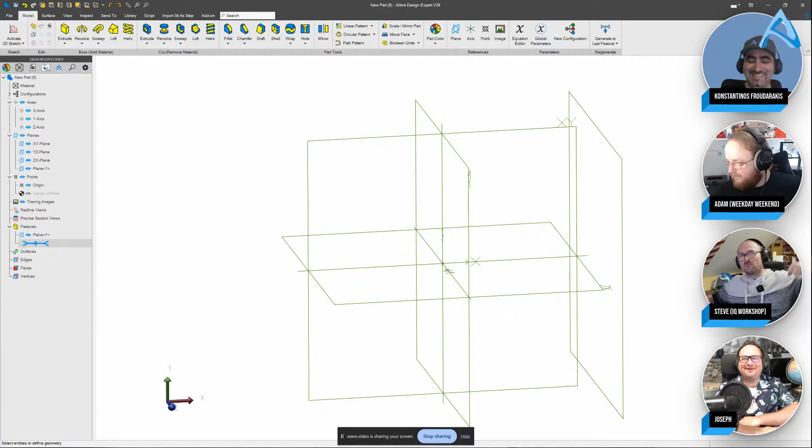However, comparing it to Alibre is like riding a bike, whereas FreeCAD, with all of its different workbenches, is a little bit like that sketch in Mr. Bean where he's sat on top of his Mini in an armchair, and he's driving it with a mop and a rope. I find I've got to do mental gymnastics to use FreeCAD, where I can just get on with my work in Alibre.

I think that's a great analogy, actually. Costas had a fantastic comment on one of my earlier videos. It's basically like you can get FreeCAD to work, and if you learn FreeCAD from the beginning, it will work for you, but it's almost like learning the right thing the wrong way. Alibre is industry standard, guys. It does everything the same way that every other CAD software does it, or better. And FreeCAD, you're having to go through hoops to do some things. Tools aren't named the same sometimes, or features don't work the same as they do in other CAD packages. Whereas Alibre is much closer to, or exactly, or better than what you would find in the other options.

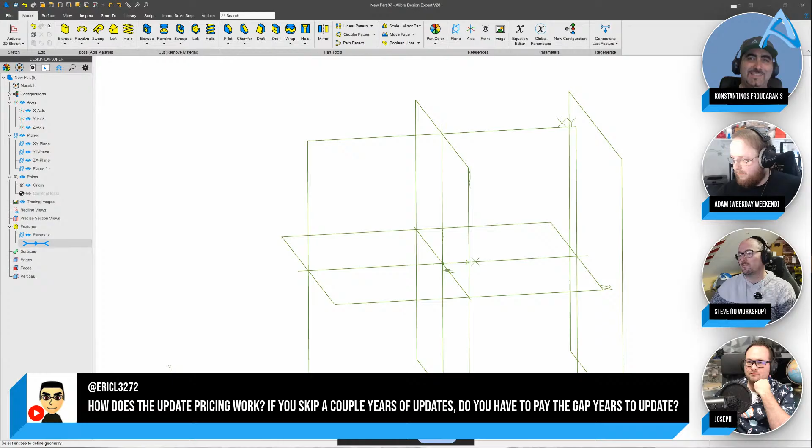So Eric, in Alibre, I'm not 100% sure on the actual amounts, but there is a small late fee. In Greece, for Expert, the update is something like 400 euros, and the late fee is something like 200 euros. But that's it, and you get the latest version and one year of maintenance, so you can download the latest version and all that. That's a ballpark number. But no, you do not need to pay full price for every single update that you missed - that's a very bad business practice. These are things that actually make me kind of angry. CAD companies charge that because they think they can, and they shouldn't.

I've actually recommended Alibre on that same premise. Exactly. Yeah, they're squeezing the lemon too hard. They are. It's just that, isn't it? It's just that.

I thought this one was interesting - how to rotate a plane a given amount.

We're still looking at my screen. So one thing you can do is use a reference plane and create an axis, and then say, I'll make a plane here defined by this axis and another plane, and what's the angle between them, maybe 30 degrees. But I think what the user is really getting at is if I make a sketch on this plane and then later says, oh no, I want to rotate this plane, how can I do that?

We can finagle the history tree a little bit and say let's pretend this axis doesn't exist. I can make a plane and offset it the same amount. Now I don't remember how much that offset was... let's say 2.5... 3. There we go.

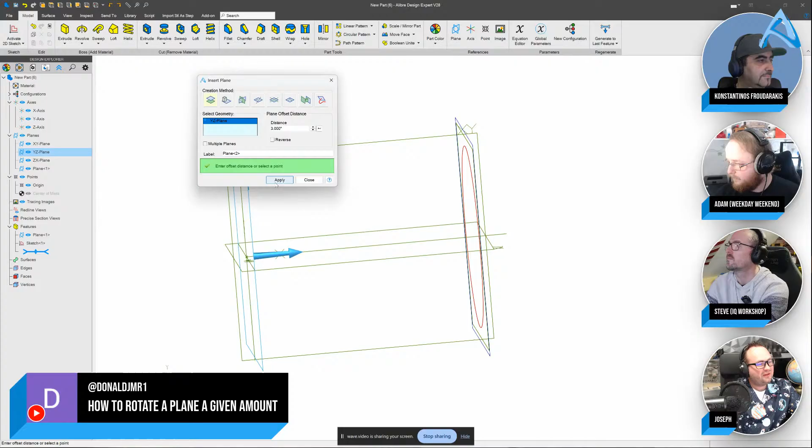So if I have two planes overlapping, I can take my axis and define it on this next plane. Then I can take the plane that has my sketch on it and drag it down the history tree so it's the last thing. Then we can redefine it on the YZ plane and on my axis. Hopefully I get this to work. So we edit and choose our axis. Yep, and then it goes to our angle, 30 degrees, and there we were able to rotate that sketch.

We can always change the order of things in our tree so it doesn't have to be fixed the way it is. Let me know in the comments if that answers your question.

One other one: can you add left-hand thread design in the custom thread sheet? Excellent question. As of right now, that's not supported. Please document that need and use the suggested feature, because we'd love to know if a lot of users are looking for left-hand threads being natively supported in our tool. They obviously can be manually edited, and you might be able to mirror the part to get that as a workaround.

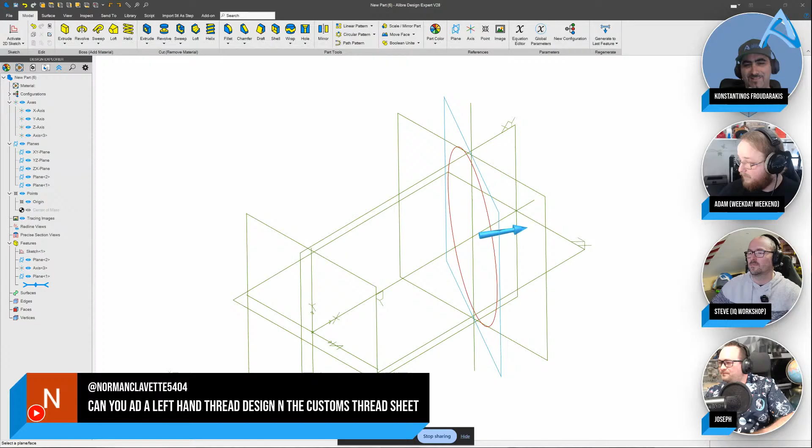You can mirror the part, right? Could you do that with surfaces, I wonder, Joseph? Yes, you could. I don't know how much we want to get into that, but that's maybe a great standalone video. Mirroring the part will give you a left-hand thread. Yeah, for sure.

Bradley Erickson asks about importing an STL. We covered that just a couple minutes ago. Kostas has some good stuff on importing STLs. There's some workarounds needed, but it's possible - you have to go through some other hoops, but you can do it. Kostas has some good videos on that, from Ex Machina Engineering.

I'm going to try to see if I can finagle a left-handed thread. Here's another one that might be interesting for you guys, especially Steve. Do you do much woodworking? I wouldn't exactly call the work that I do woodworking. I mean, I probably ruin boards, but... I think you're just being too modest. That's what I think.

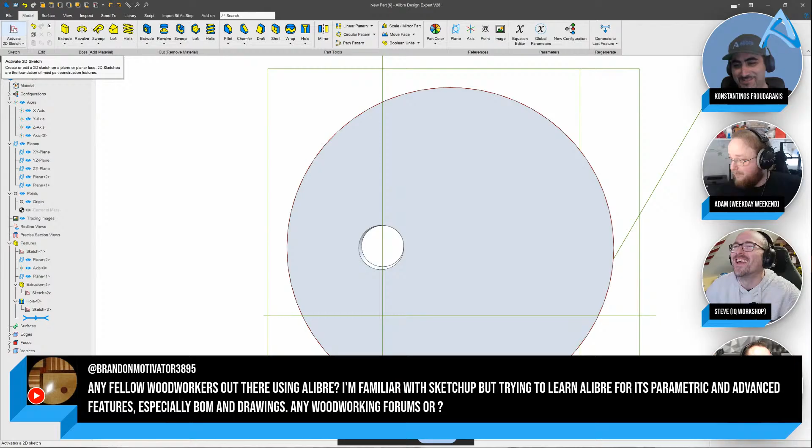This one's looking specifically at if you were to build an assembly, can you get a bill of materials and the drawings so you can have a cut list and all that sort of stuff. That's not something I've done using Alibre natively - it's something I've done manually, but I guess that's not going to be the answer to the question, right? What can Alibre do in that regard?

Well, can I just say that if you watch my channel, watch this space in the next month or so for a nice little woodworking mini project. But yeah, definitely bill of materials and drawings.

The beauty of Alibre as a parametric modeling software is that you get a bill of materials and the drawings, and they update when you change your part. So you can have a cabinet, for example, and design it so that when you increase its height, the sides adjust themselves, and you can have 3 or 4 shelves in it. As you make these changes parametrically, the bill of materials is going to reflect that and update, and the drawings will also update with the new dimensions automatically. That's the beauty of parametric modeling over something like AutoCAD.

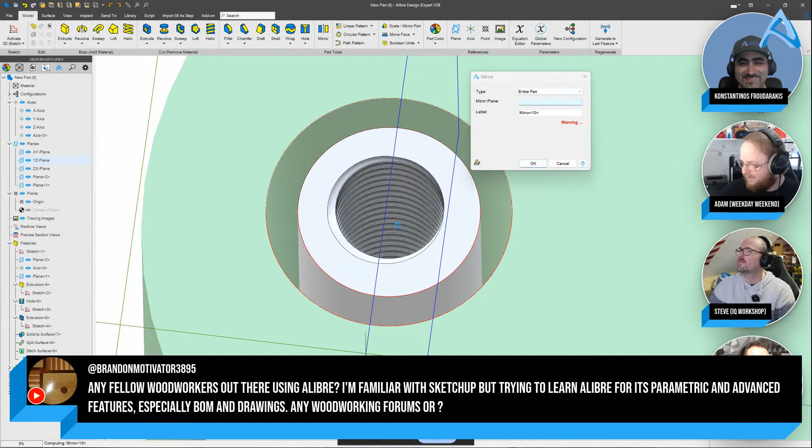Getting back to this question - I think I added such a long thread. But the way I would use surfaces... Yes, that's what I thought, great minds think alike. I created a thread, converted the whole thing, used a cut to cut out this thread so it's its own floating body. I converted everything to a surface, stitched this to a solid, and I'm trying to mirror only the thread so other features on this model are ignored. Then we can stitch it back into a solid. This is pretty heavy, so we'll see what happens, but that would be my approach if we were using surfacing.

I think we have another one here. Do you rename every constraint, or use the default name? I've gotten into the habit of using default, and it's very difficult to find the correct constraint. Excellent question. There's an old saying: not every good modeler renames everything in the tree, but there are no bad modelers that rename things in the tree. I had a professor in university who taught me CAD, and in exams he would take off marks if you hadn't renamed every single sketch and feature. That was annoying during an exam, but in a large model it can be a lifesaver.

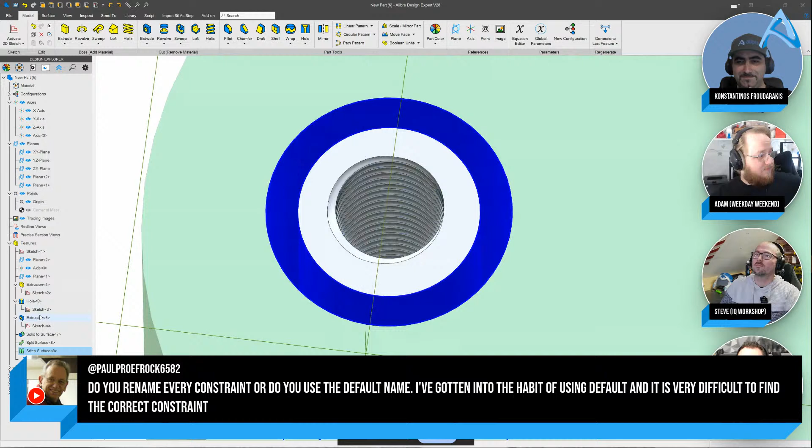When it comes to renaming every constraint, I rename the important things, especially when it gets convoluted. You can use all caps if you want something to stick out a little bit more. But yeah, hopefully that helps.

I don't rename anything, and my helper has to fix that. That's me in the future. Gotcha, your helper is you in the future. Very much so, and your helper always curses the previous person for not renaming everything.

Bradley Erickson, thank you so much for the comment, I appreciate that. This might be a good one for you, Kostas: what is the best way to create a reference mid-plane between two features? Oh yes, that might be a good one.

Let's go to your screen, Kostas. Sorry to shove one at you, but that's what I'm interested in. Do not be sorry to do it. Okay, so there are many different ways to do it. Let me just get a quick model going.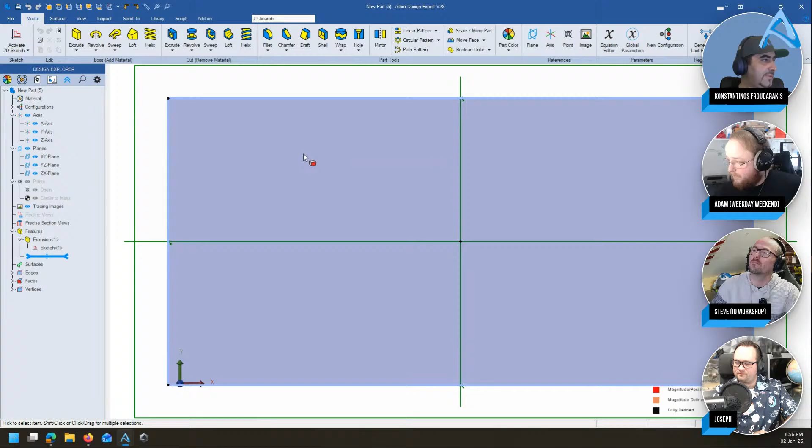So I'll do 100 by 50, let's fully constrain it, let's do 10. And then I'll just start another sketch - I'll imprint everything, get a rectangle going for 20, and let's do that for 50 millimeters. Then let's mirror this. I promise you guys, there's a reason I'm doing this. Okay, so let's say we've got this part.

Oh, that wasn't very clever, was it? Yeah, well, it was. Let's see.

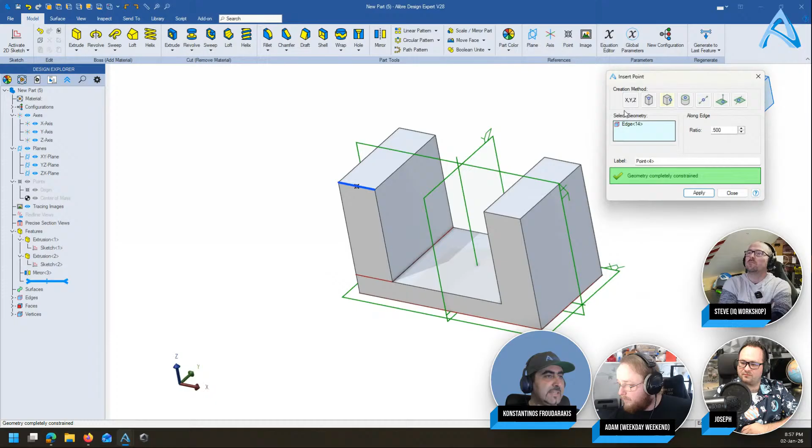So a couple of ways to do midplanes. Let's say we want to make a midplane along this finger here. I've done one of my very first videos about this. You start a point and click on that edge. Alibre, when you select something to create a reference, points you to the correct creation method - so when you select the edge, it goes to the along edge creation method. 0.5 or 50% is the default value, smack down in the middle. I hit apply, and now I've got a point. Let me show my points - so now I have a point there.

So then I go into the plane command. Again, I do not select the creation method - I just go and select that point, and then I select the edge, and it goes into the axis point creation method. Then I click normal to axis, and now I have a midplane along that feature.

Okay, so there's yet another way. Let's go again into the points - I click on that vertex, create a point, I click on this vertex, create another point. Here's the interesting thing: when you have two points and click on the first one, then the second one, it says two points interpolation. It kind of creates in memory this imaginary axis along these two points, and you can select the ratio. So if I do 50%, I can click that, and then I select this point, and I select this... well, what else can I do?

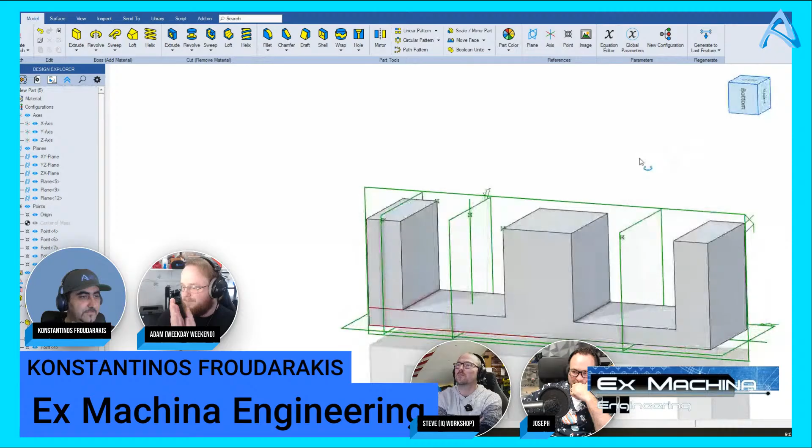That's extremely helpful. Let me see if I can do something else here. There you go, so let's do that again. You've got 2 points here, right? I selected the 2 vertices now, I didn't even create the points, I selected the 2 vertices. It went into 2 point interpolation. So now I select my plane selection, plane creation. I select the point, I select this plane. There you go. Right, so those are 2 great ways to do planes between features. Beautifully done.

Yeah, this is why we say Costas is a black belt in Alibre. All these little tricks. Come on, guys. Thank you so much, guys. Thank you so much.

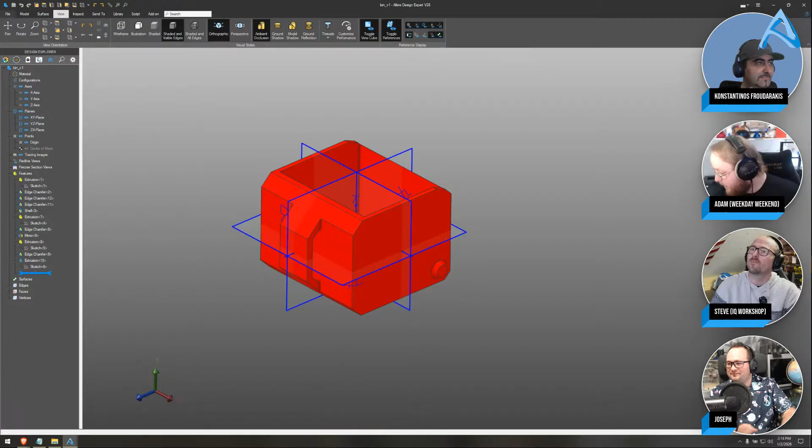I see some activity from weekday weekend. Let's switch to your screen, Adam. He has a very good question here: can I hide dimensions? I'm assuming in Sketch, right? I think you can, yeah - I would imagine it's probably in the View tab. You can toggle the dimensions. So if you go in there, do you see it, Adam? Go into the Sketch tab - the blue 2D sketch. Over to the right, all the way to the right, bottom left button. There we go - toggle sketch dimensions. See, Costas, he's got it again.

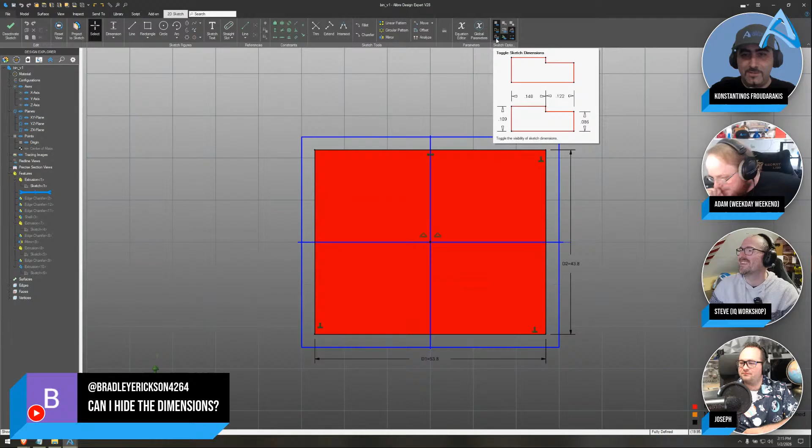You can't leave dude, we're gonna tie you to your chair, you're not allowed to go anywhere. I kind of have to actually, but I can definitely tell you guys that if I could, I'd be here all day. Look guys, most of you know that I'm into racing, right? One of the most famous races in the world is the Le Mans 24 Hours. So how about we do a 24-hour Q&A stream? We'll do some streamer driver changes - we'll go for 24 hours, the four of us can do it, we'll do 3-hour stints and we'll be fine.

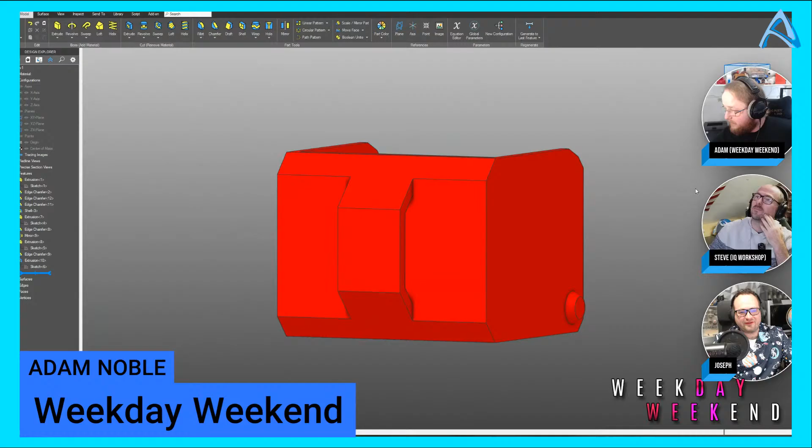If you don't mind, I'll take the screen from you just for a quick sec, Adam. Another thing that really seems to affect fillets is if we go to Inspect, Check Part, we can choose an accuracy, and when we apply a check, we can see if anything has failed. We want all zeros or dashes in this column. If something is failing, that can sometimes affect the integrity of fillets in unexpected ways. So if we have any errors in our models, it can point out bodies, faces, edges, or vertices that we can go back and take a look at.

And making those not fail anymore can often increase the integrity of fillets. I'll bring it back to your screen, Adam, if you had anything to share. But that can also affect fillets. I guess another good thing to mention would be the equation editor. It might be a good way to make sure your fillets stay how you want them to parametrically.

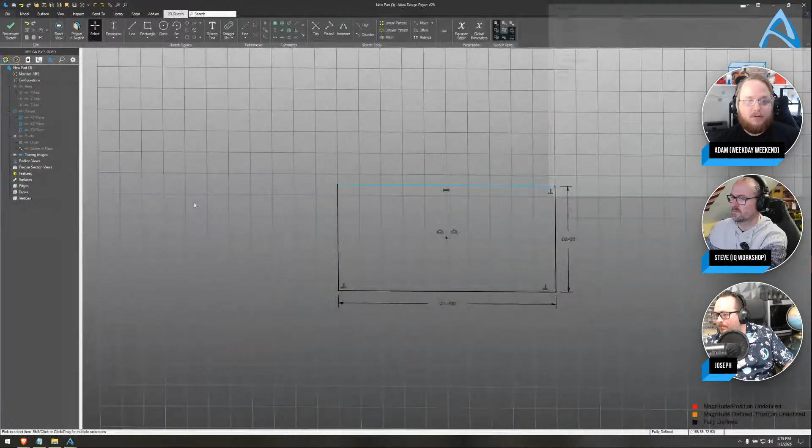Maybe if you do like, so if you guys don't have the equations shown, D1, D2 for your dimensions and stuff like that, I would turn those on. I believe it's in properties, system options. I thought for sure it was in... it might be in properties or system options. I always forget where it's at because I only turn it on once and then forget about it.

Well, you know what, no, I think you were right actually, I think it's in properties. Is it in properties? I found it in my video. Yeah, it's on file properties, units, dimension, show equations. Or right, no, not units, dimension, just the dimension. Just in dimension. Okay, yeah, show equations right here. So you can use like D1 here, for example.

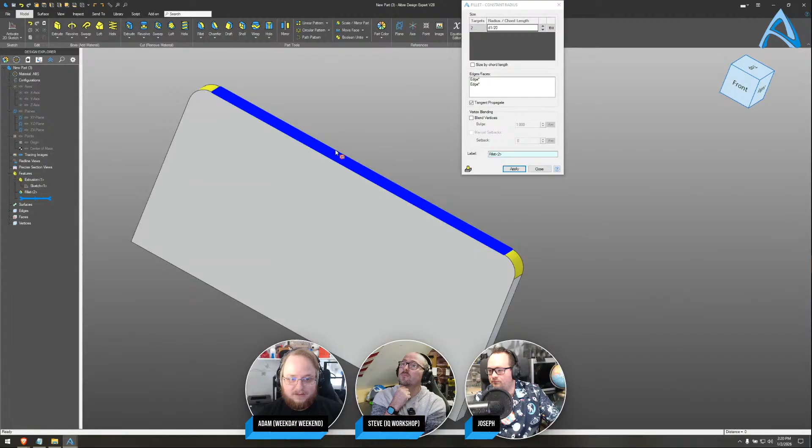Now, if I just extrude this, I don't know, 5 is fine, and I try to add a fillet here, of course you can add your actual dimension, whatever that might be for your fillet, but maybe I want to do like D1 over 5. I guess that's a bad example because it should be the same amount, but you could do it like that with the equations, and that way you kind of get it parametrically. Make sure it's not going to break if you choose a value that actually works there. You can use the equation editor to your advantage there, maybe to have more control over your fillets if you make your dimension a little larger.

So if I go back in, I should have actually kept that fillet. If I do like D1 over 10, and then I go in and modify my sketch to be 125, it'll still do my fillets accordingly. That might be another way to go about it.

Just if I click share, is it going to share my screen? I assume. Yeah, you can share your screen. I'll give everybody a quick preview since it is relevant to this question, of V29. Let me try to do this.

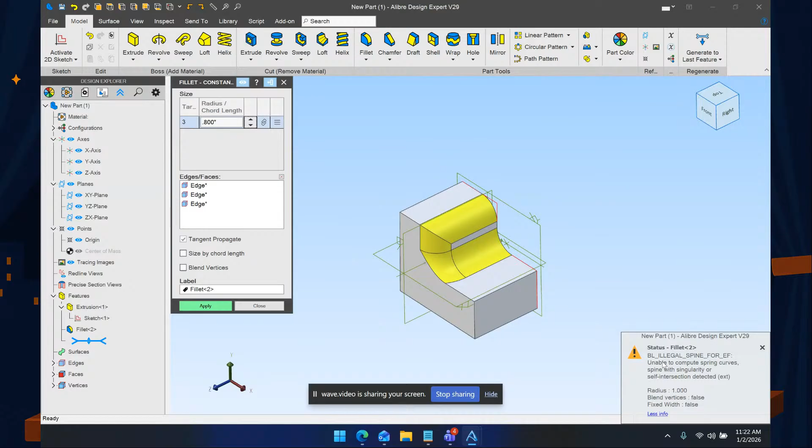Anyway, the point being that this is just a quick preview of not only the new notification system in V29, but a high level look at what some of the dialogues look like.

You'll see a few of the fundamental approaches - the previous extrude boss dialogue, for example, was really dense and half the stuff's grayed out at all times, and it doesn't make a ton of sense. So we've taken a different approach of only showing you what's available and letting you enable things to show them in the UI, but otherwise they stay hidden.

That approach has been carried out through all kinds of stuff. The color properties dialog - it's a little easier to select your colors and you can edit the colors, and those will actually stay between sessions and things like that.

These are just silly examples, but the point being, from the extrude dialog to the way we're showing notifications all the way to part color, throughout the entire product we've tried to make tons of little micro improvements to make that process easier and make the UI smaller and more digestible, without showing you tons of things that aren't applicable to where you are in the workflow at any given time. Anyway, hope that was a fun little preview.

Beautiful stuff, I like that. And it's for all you folks who lasted this long and stuck with us. Thanks, Max. By the way, this new UI is actually what allows us to talk about the possibility of Linux and Mac compatibility, so I think we might owe a lot to it, and I'm really excited to see where it goes.